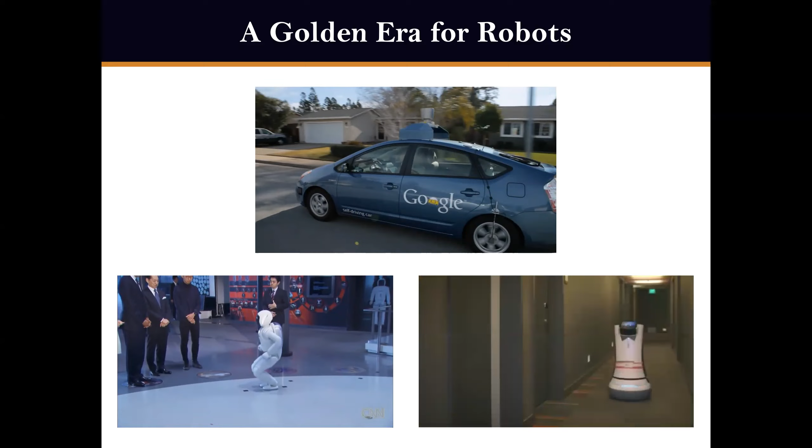We are seeing a lot more robots coming in. Self-driving cars are getting everywhere, and obviously some of you are already affiliated with nuTonomy, one of the companies taking the lead in this area. All in all, we are seeing a lot of autonomous systems entering our society.

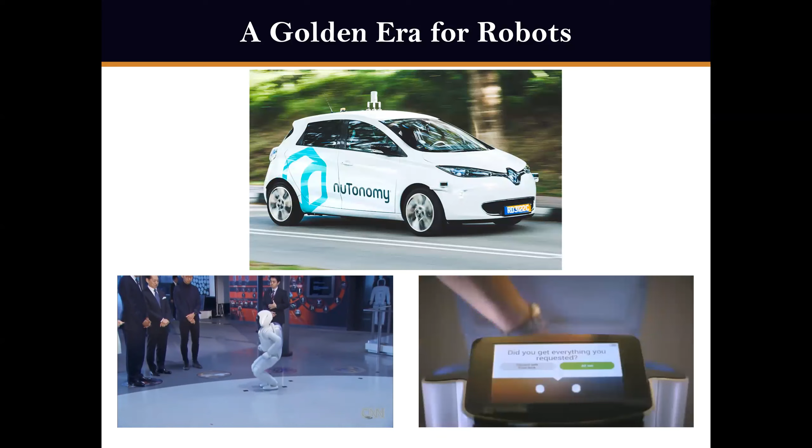And that's not just in transportation. We see them in our air, like drones. We see them in space, like NASA's Astrobee, which is on the International Space Station and performs tedious tasks that we don't want astronauts spending time on, like cleaning the rods of the International Space Station, which turns out to be a very important thing to do. And we have underwater robots these days too - it's a blooming field.

Once in a while, we see these videos from Boston Dynamics that show capabilities of robots doing things that only trained humans can do. Not a regular person, or someone like me after a year of pandemic being out of shape - I can't pull that off anymore. But these robots can do it, even coordinated dancing.

All of this is a glimpse of hope for the future, but I want to claim that they may be a little misleading. What they suggest may not be reality at this day and age. Many of these robots have shortcomings and they make mistakes, and those mistakes become evident when we put them to the test.

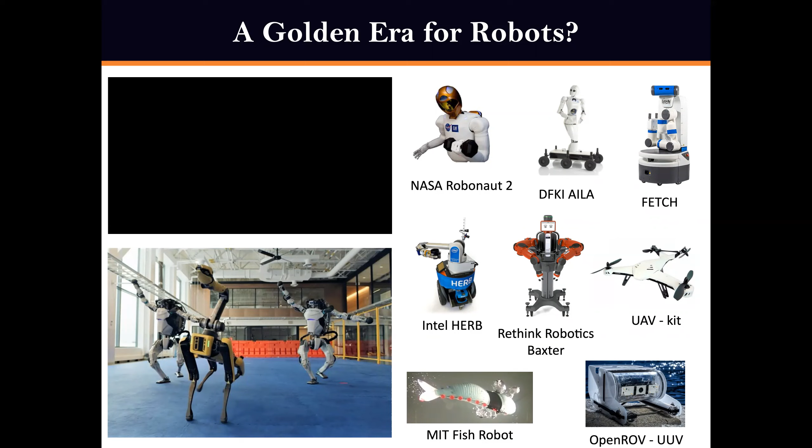Like in 2015, DARPA put up this challenge after they saw what happened in Fukushima, Japan, when we had the tsunami - the nuclear plant was damaged and there was a leak of radioactive material, and we sent in humans to fix the problem, putting their lives in jeopardy.

But DARPA said, okay, why do we send humans? If roboticists claim to be so good, they can build these autonomous systems, why don't we use robots to address such problems? So here's a test for you, roboticists: here is a robot, have it drive a cart, get to the door, open the door, turn a valve, drill a hole into the wall, move the box, climb the stairs, and declare victory.

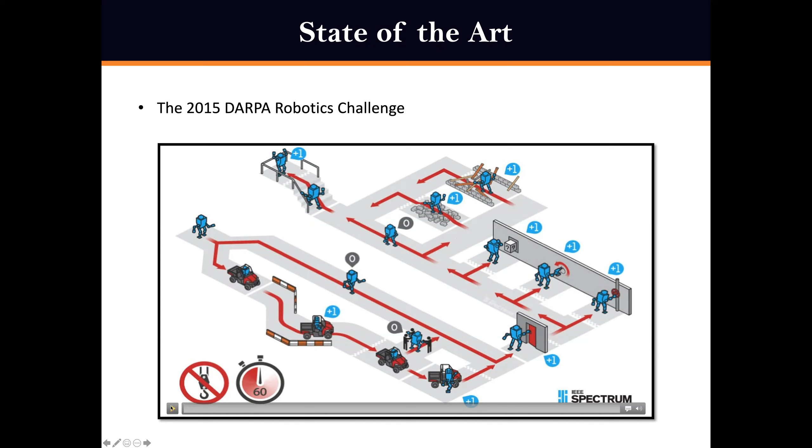Or if you want, you can get more points by walking over uneven terrain or soft sand. A lot of teams participated in this competition, and here's some of the results.

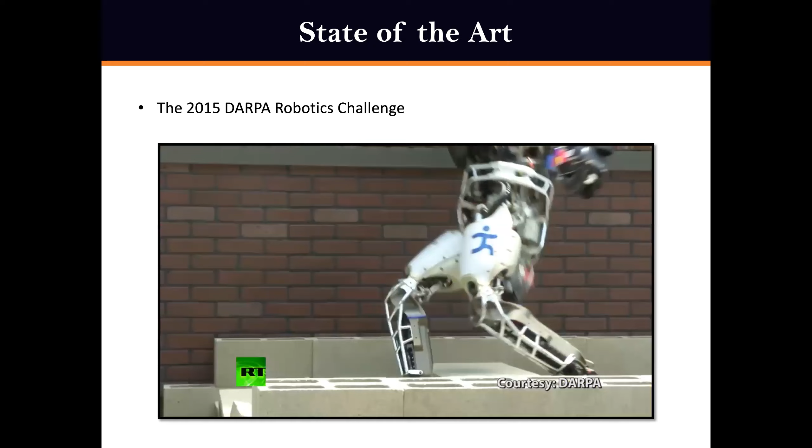Some of them are really hard to watch.

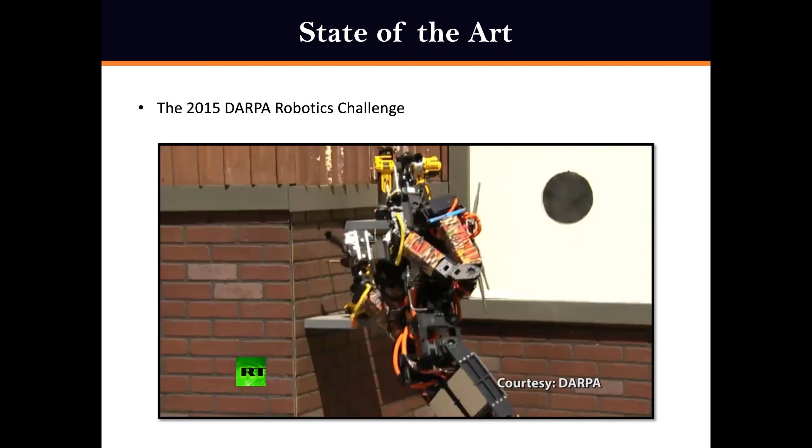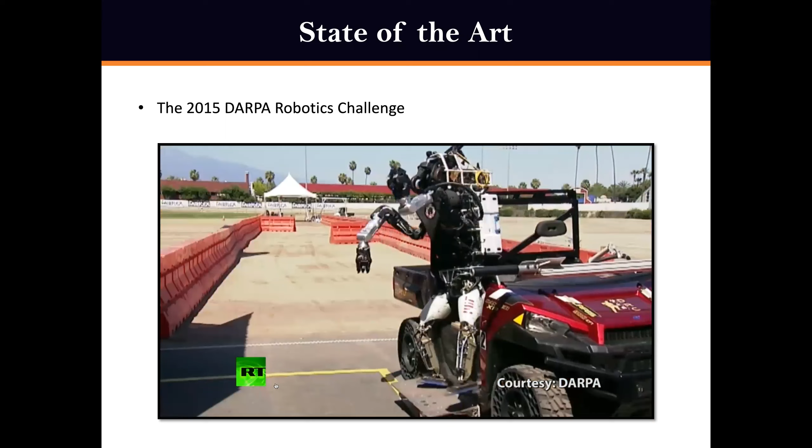Okay, that's where I wanted to stop. So the robot that we saw actually fell out of a car. It was a robot by, I believe, a group led by Russ Tedrake.

So there are many issues that came up and many reasons for these robots to fail. Some of them may be because of human intervention - they could have humans behind at every step of the way to program the robot what to do next, and some of those humans were under pressure and made mistakes in their coding.

And some of the other failures may be due to unmodeled dynamics, like walking on soft sand. It's really hard to model those dynamics and then write control laws for them.

And famously, Russ Tedrake, after the experience that this robot failed, said: we went with as much autonomy as possible because we wanted to rule out human mistakes, but we forgot to verify the system. Now doing formal verification and formal synthesis for our systems is a priority, because we want to completely rule out errors. And that's what this talk is about.

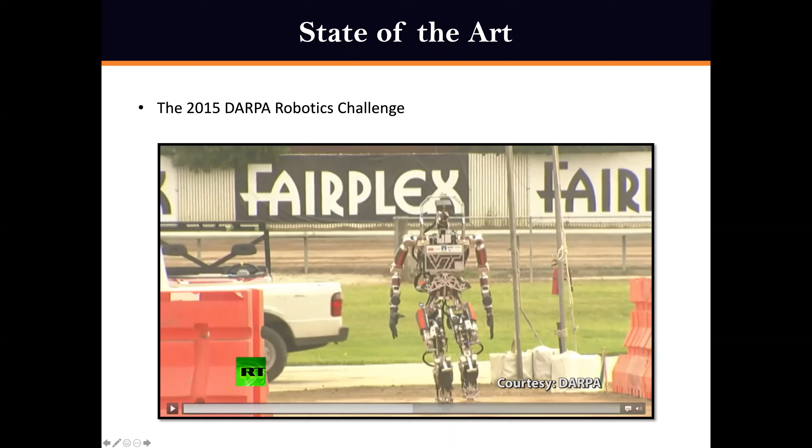It's about ruling out errors and trying to replace all those details that we usually handle by hand - leave it to algorithms, then leave it to specifications, and they take care of it. Because if you have mistakes in this controlled environment, that's fine - it's not a problem, because these are learning experiences.

But if you actually employ some of these techniques and put them on autonomous systems, bad things could happen in our society, and some prices are too high to pay. These prices are usually embedded in the fact that we are using AI-enabled autonomous systems, where we use some sort of machine learning or trained neural net or other functions as a black box in our designs, and we don't really know what to expect from the outcomes.

So in my group, we are interested in safety and soundness in general - that's the central theme in my research. We want to guarantee safety no matter what, and we want an intelligent way of reasoning about the behaviors of a system, and we want to do it algorithmically, using methods known as algorithmic approaches to correct-by-construction methods for control design.

This is a field that started in the early 2000s, when a bunch of control theorists were exposed to formal methods and started applying those in control theory, and then roboticists started applying those in more physical systems. So my research is at the intersection of control theory and formal methods. I think everybody is familiar with control theory, and formal methods, I think, will be fairly clear for those of you who aren't yet.

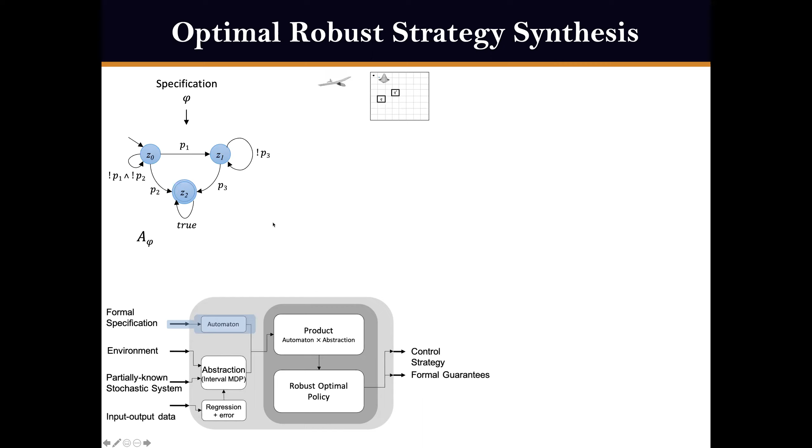Okay, so taking a step back, I'm going to construct an automaton from my specification. Then I'm going to regress my unknown function using a GP and quantify the error, and then construct this abstraction in terms of an interval valued MDP. And then I'm going to take the product of these two. Essentially, this product is all the ways my system can satisfy the specification, and I inherit the accepting state from my DFA, and I inherit actions and transition probabilities from my IMDP abstraction.

Now the task is finding some sort of a strategy on these objects such that I can get to my accepting state. If I can get to the accepting state, then it means that I can satisfy my specification. But how do I compute this path, or policy, or the probability of getting to an accepting state? Because I have ranges of transition probabilities now. Well, there are several interpretations of this model.